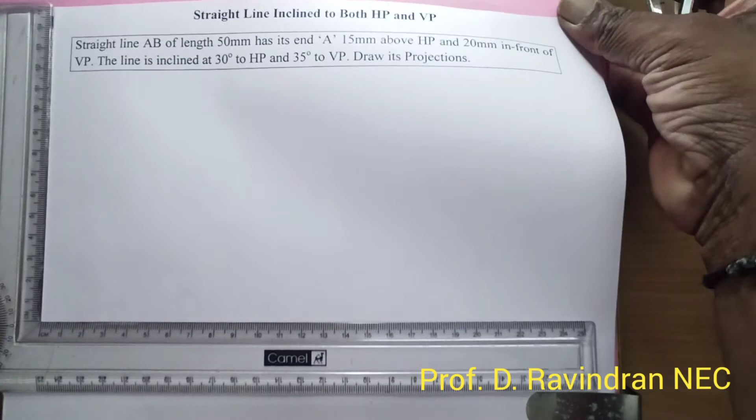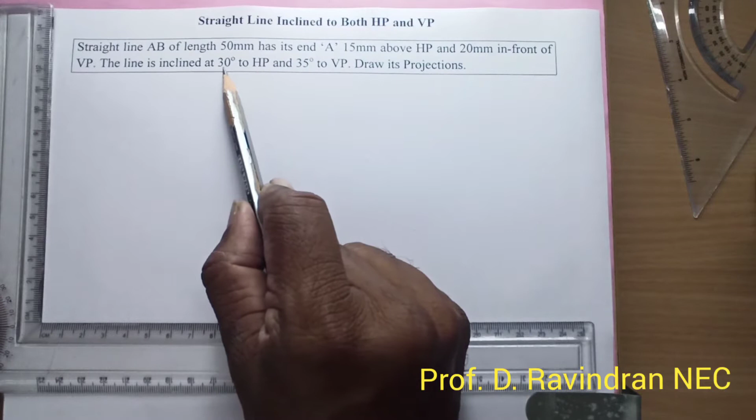Now the straight line is inclined at 30 degrees to HP and 35 degrees to VP. Draw its projections. So the line is inclined to both HP as well as VP. 30 degrees inclined to HP; we can see this inclination only on the VP. It is 35 degrees inclined to VP; this inclination we can see only on the HP.

So for this problem, first let us construct one XY line, and then initially let us locate the point A which is 15 mm above HP, that we can see only on VP. It is 15 mm, and then 20 mm in front of VP. This is the projector, this is the point A dash, and this is A. A dash is at 15 mm above HP, and A is 20 mm in front of VP.

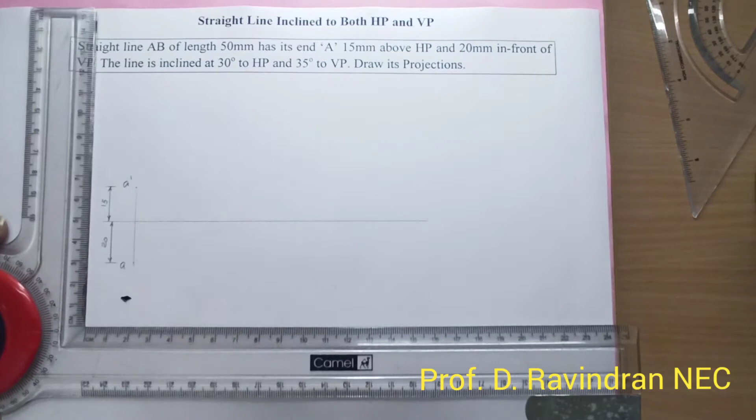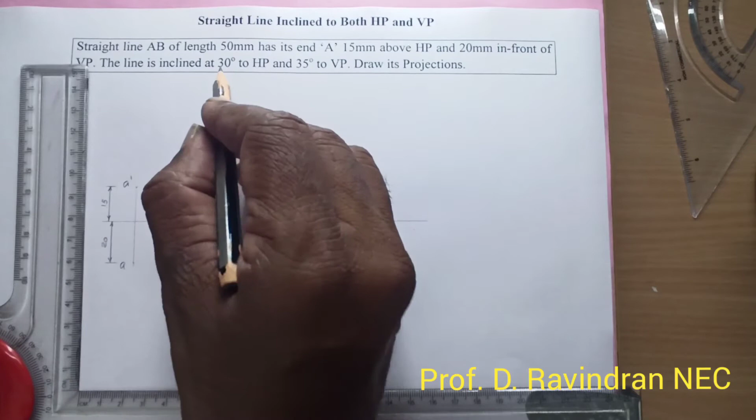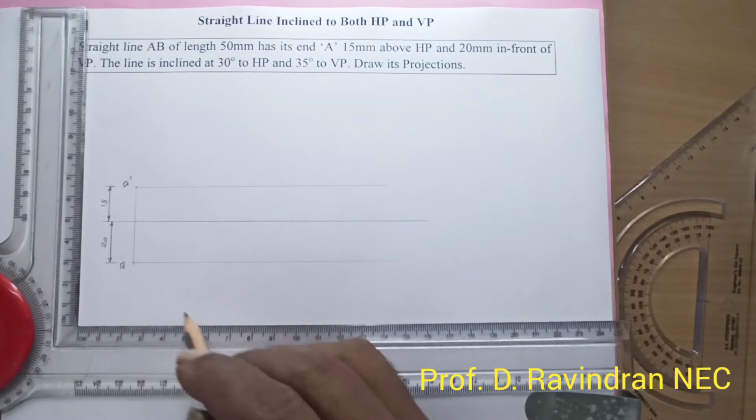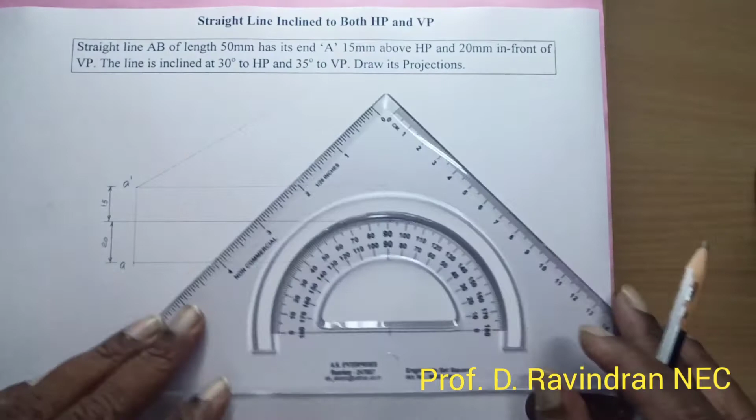Now here we are going to construct this 30 degrees and mark the true length from the point A dash. That means 30 degrees inclination to HP you can see only on VP. Before that we can construct one locus of A dash as well as A. Here we have to make 30 degrees and here 35 degrees. So let us use a protractor. I mark 30 degrees and construct one light line, then we can make it dark. Here it is 35 degrees, so here I construct this line.

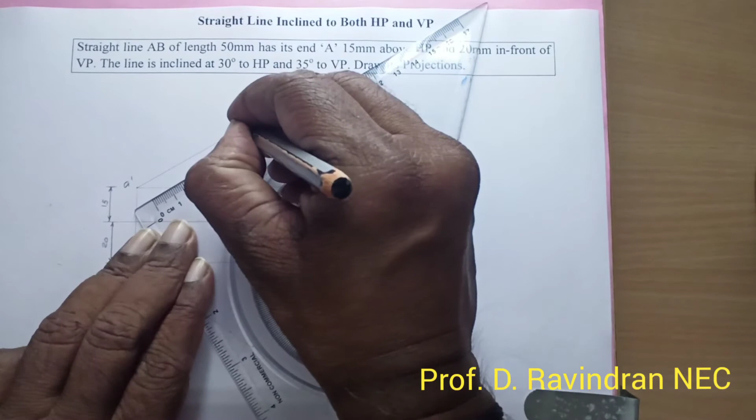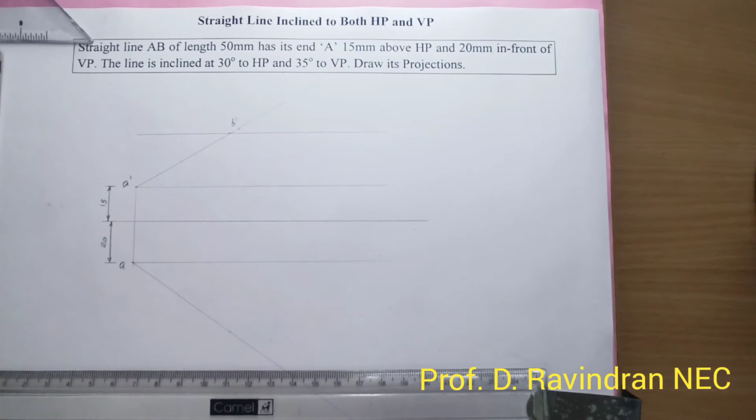Now we can mark the true length of the straight line, given as 50 mm. From point A dash I am marking the point B1 dash at 50 mm. This is B1 dash, at 50 mm. From this B dash I can draw one locus also. Similarly, this inclination is 35 degrees.

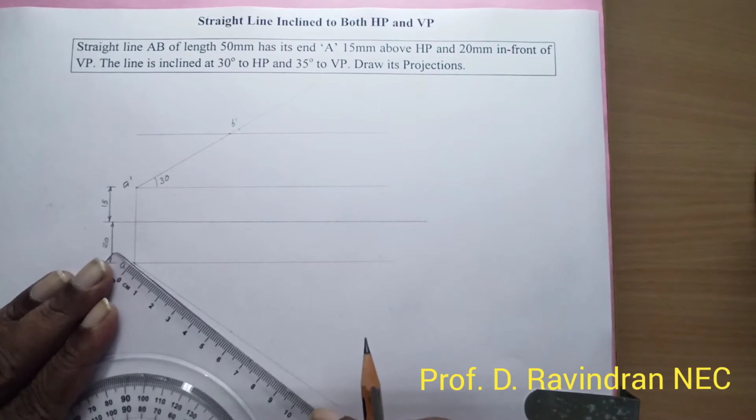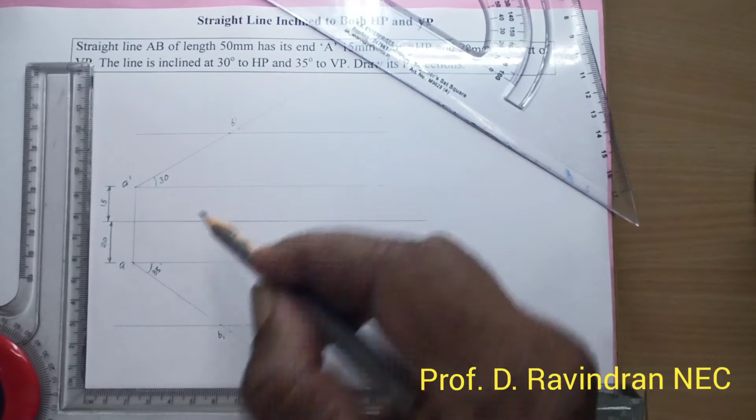Now I mark the same 50 mm line on the 35 degrees inclined line. This is the point through which we draw another locus. This point is B1. These two lengths are 50 mm and this one is inclined at 35 degrees. Now we project this B1 dash along this line of A, and we get this length. This length is the top view length of the straight line. Let us call this point B.

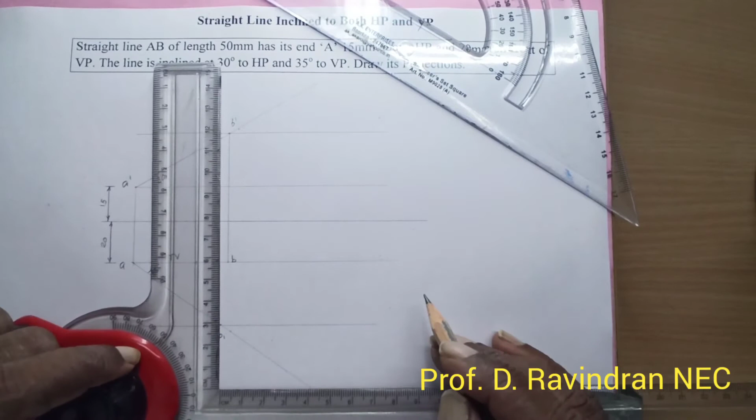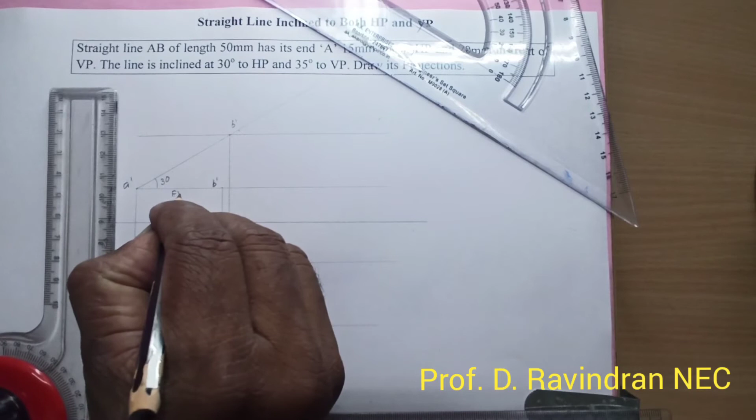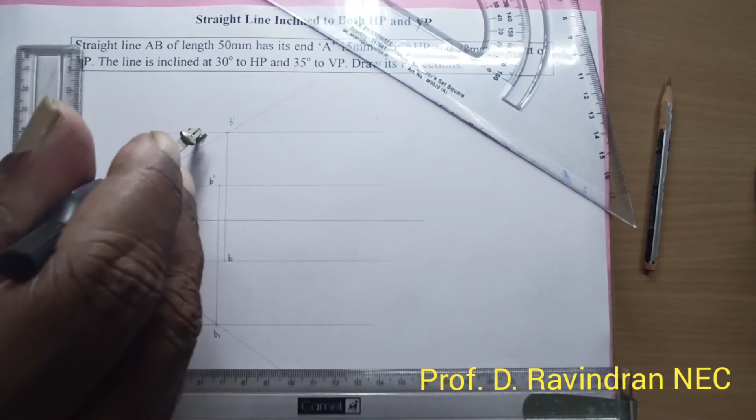From B1 we project till the locus of A dash. This one is called B dash; this is your front view length. Now with these lengths we make an arc and cut on the locus. To get the front view, take this length as radius and draw one arc to cut your locus. It is cutting at this point. This is called B dash, the actual front view of the straight line.

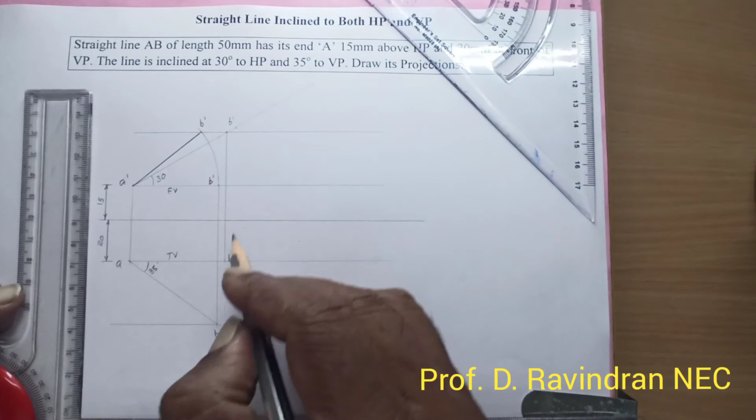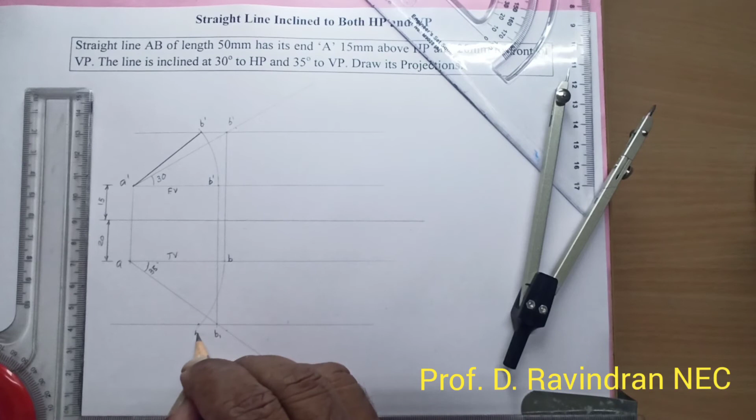Now to get the top view, either you can draw a vertical line or make this AB as an arc; both meet at the same point. Take this top view length A to B and draw one arc to cut the locus of B1. It is cutting at this point. This is your B. Now join this with a dark line to indicate the top view of the straight line. We can check these two points lie on the same straight line.

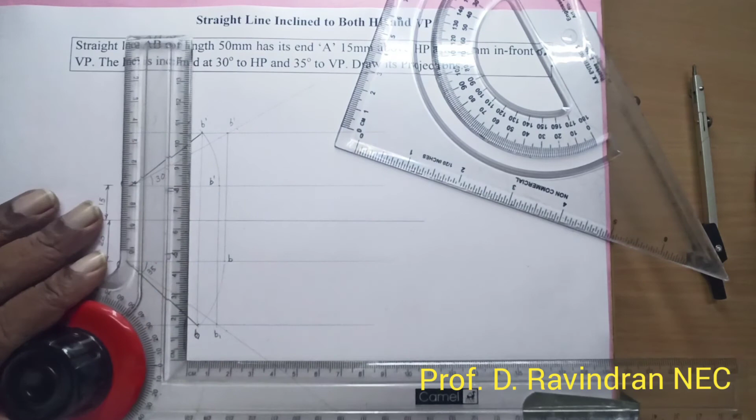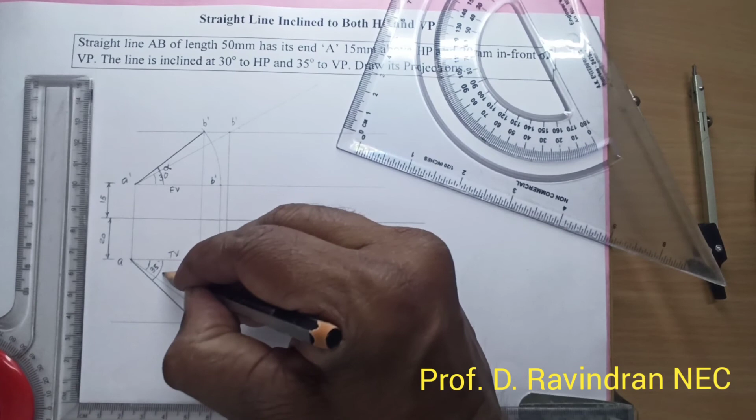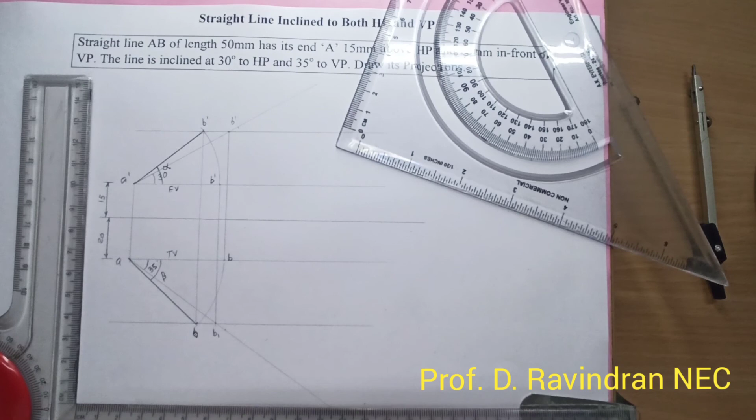The inclination the front view makes with the horizontal is called apparent inclination alpha. The inclination the top view makes with the horizontal is called apparent inclination beta. When the line is inclined at 30 and 35 degrees to HP and VP respectively, both views are inclined more than the real angles: alpha is more than 30 degrees and beta more than 35 degrees. This completes the projection of the straight line inclined to both HP and VP. Thank you.